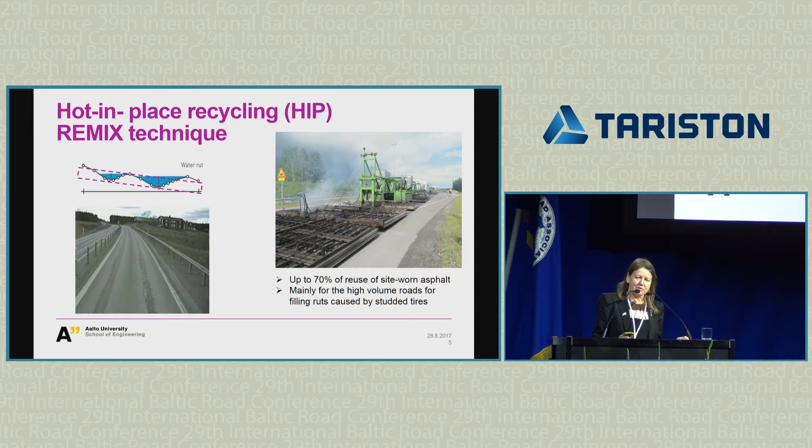We've been doing this over 40 years in Finland, and this hot-in-place recycling is really the working horse for the high-volume roads when we need to fill the ruts that come from the studded tires. The beauty of this is that we can use 70%, give or take, of the old material. We can retain the hard aggregate we've invested for these surface mixes. The cost, depending on how much admixture or new material you add, is about somewhere around half the normal asphalt slab.

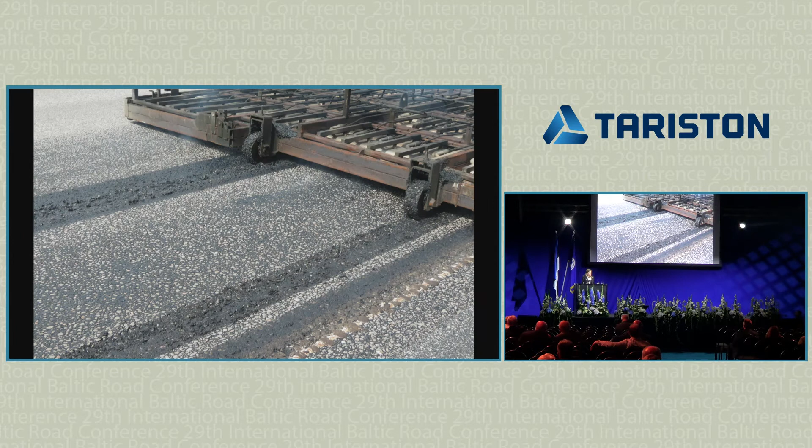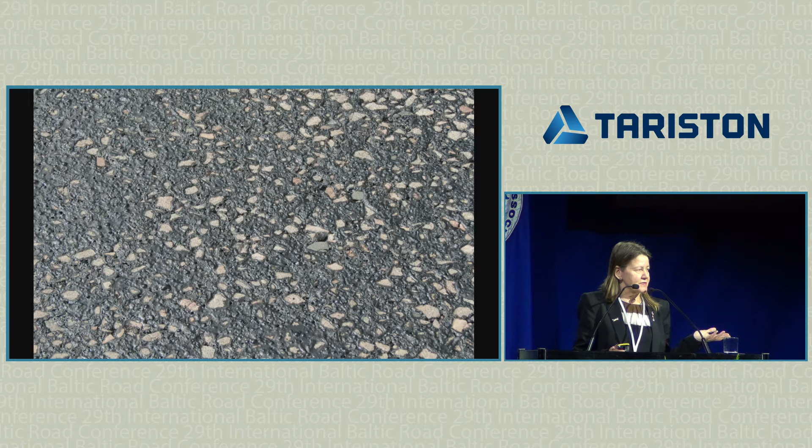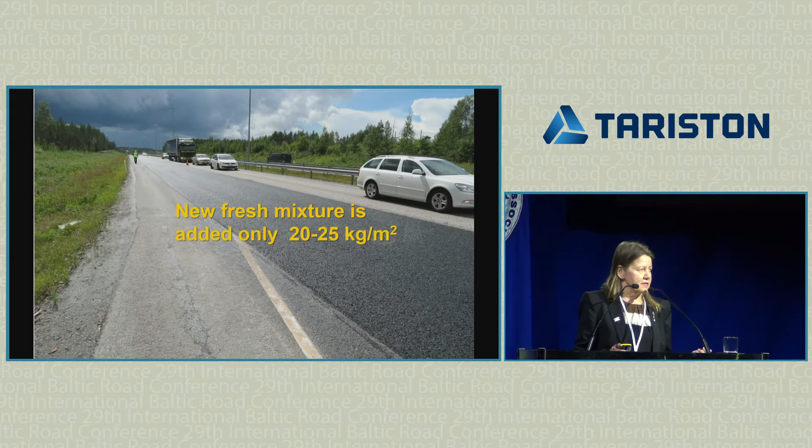So a few pictures. Here is sort of the convoy, heating elements. This is the heated surface - this is how it looks like. Ready surface - now the admixture has been added, scarified. The heated surface is scarified, then admixture added, rejuvenators added, then it's laid and compacted, and we have a nice ready surface for driving. As we add only these 20-25 kilograms, it sort of makes it a cheap way to fix the roads for rutting.

But it doesn't add any structural capacity, so that's sort of the key thing to remember - if we need structural capacity, we need to use something else. Also the problem is that if the road has segregation, you can't really fix it, you just sort of change the place. And if there are layers which are separated, maybe you can fix the first one, but then not the second one. Well, none of the methods can do that.

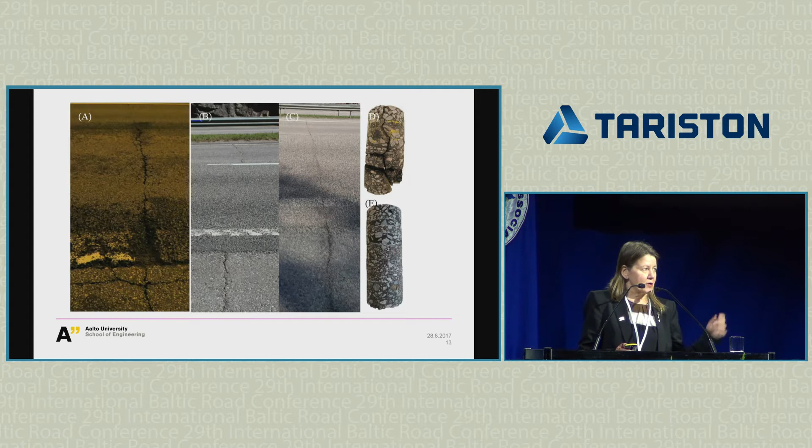You have to dig the whole road up. But if there are any cracks, it fixes that at least for a while. Of course, they will eventually reflect through. But this shows, like Highway 1, very thick pavement, so you can keep recycling. And that's sort of what we try to study right now for Finnish Road Administration - how can we do the recycling multiple times so that we can benefit from the investments we have been doing before by having all those layers of asphalt in the road.

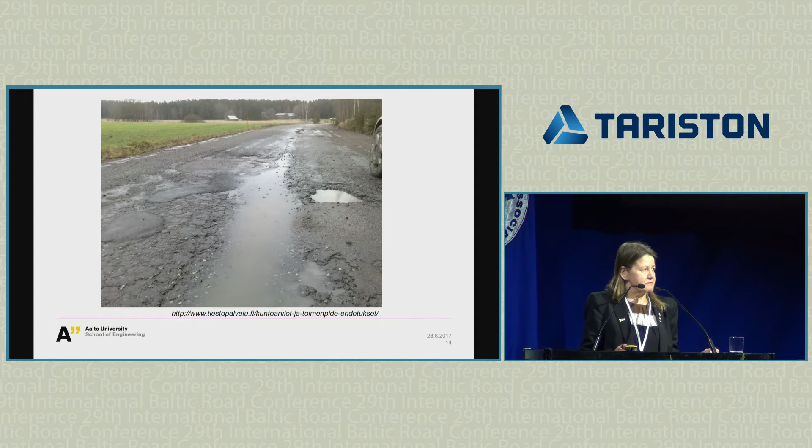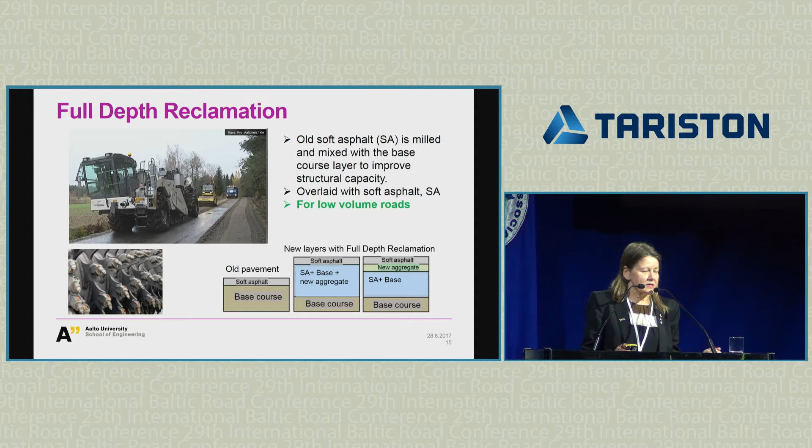Then at low volume roads, if it looks like this, there's no point to do any patching anymore. You really need to do some structural fixing. So what we do is full depth reclamation, where the old asphalt, soft asphalt, is mixed into the base course and maybe some new crushed material added, then you just put it back, compact it, and then new soft asphalt. This is really a structural method to add structural capacity, and it has replaced basically the stabilization in Finland - this is very popular in low volume roads.

Then we have this regular asphalt recycling. Site-worn asphalt is processed at asphalt plants and used in the surface mixes. Finnish specification allows use of 50% in surface and base mixes. And then there's this rejuvenation agent, like soft asphalt.

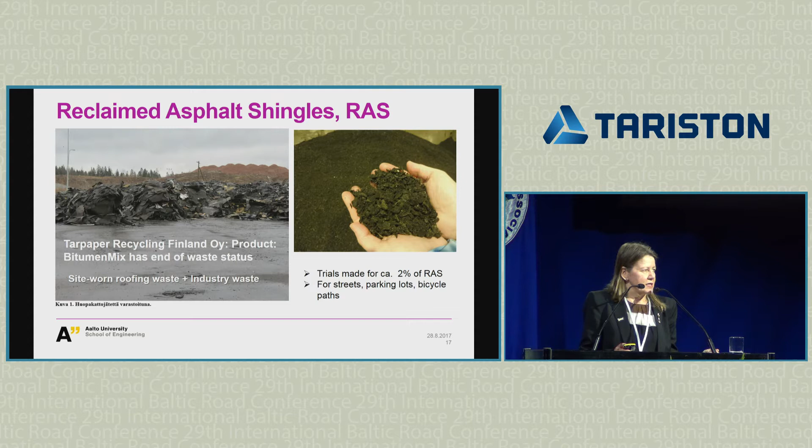The other interesting thing we have been trying is these reclaimed asphalt shingles, the roofing shingles, mixed with industry waste, producing a bitumen mix material that can be used. We tried about 2%. Of course we need more long-term performance data, but at least for now it looks good.

There are certain issues that need to be solved here, one is how these shingles are classified in the specifications. Finland has been using these recycled materials in Finnish asphalt specifications. We just updated for the European norms, this new reclaimed asphalt specification that states reclaimed asphalt is a constituent material that is ready to be used in asphalt mixes.

But then there are certain things you need to declare. One is the type of binder, if it's paving grade bitumen, modified or hard bitumen, then you have to declare penetration, softening point, soft bitumen's viscosity, gradation, of course.

So with these shingles, the question now is, is it really an additive, or should it be treated like reclaimed asphalt as a constituent material? But the one thing with these recycled materials is that when you use them in the asphalt mix, for instance 50%, the mix has to meet the regular mix requirements, so type testing. And if you change something, you need to do a new type testing.

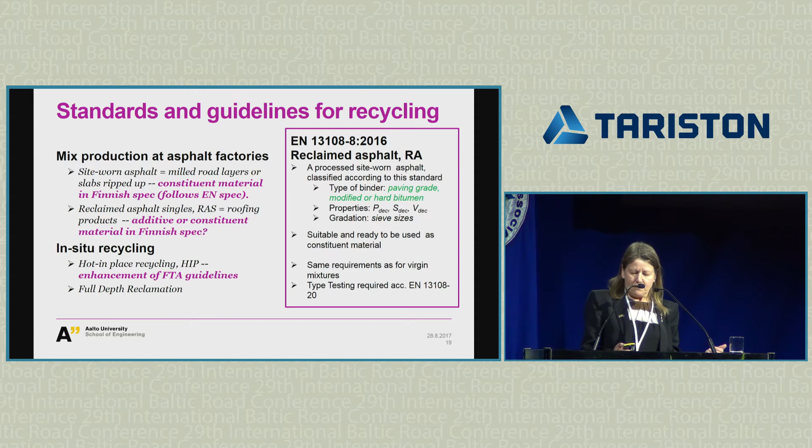So in situ recycling, this hot-in-place recycling, we do this research now for the road administration to enhance the specifications to allow multiple cycles of reuse for the Finnish roads.

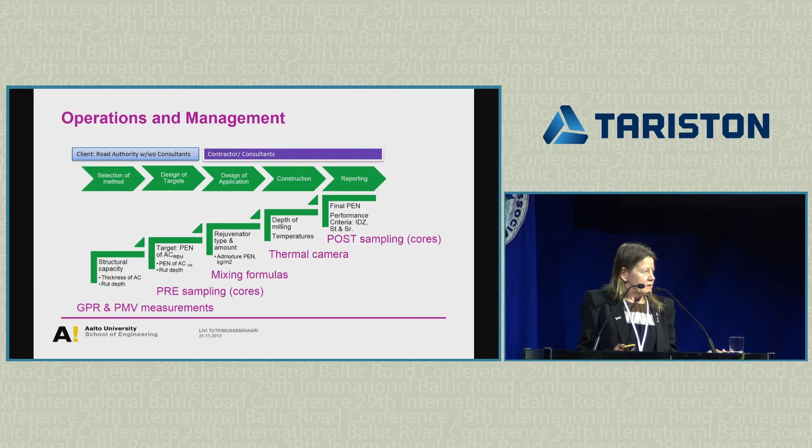So the idea is towards these perpetual pavements, very heavy base courses, and the only thing we want to do is fix the surface layers.

The question is really, what are we expecting from the surface layers, what is the life expectancy. In Finland, when we have these studded tires, the cycle is very fast, so between 6 to 7 years we need to go and do the resurfacing.

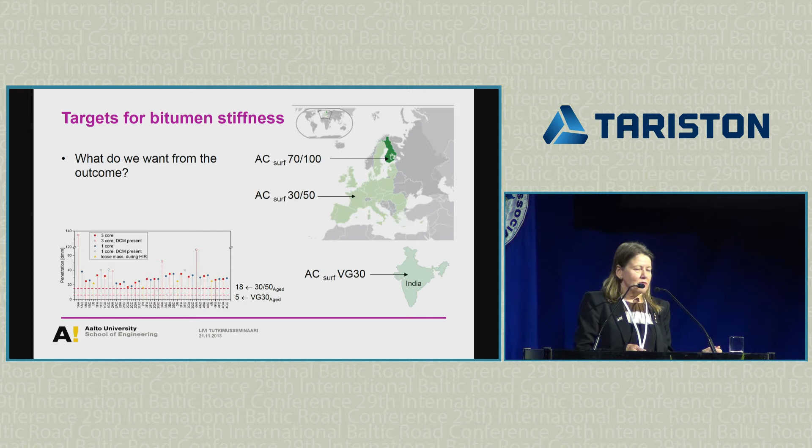But the reason is, again, the climate, it depends where you are. It depends what your climate is, because you select your materials based on that, and then you have to set up your targets depending on what distresses you are trying to prevent.

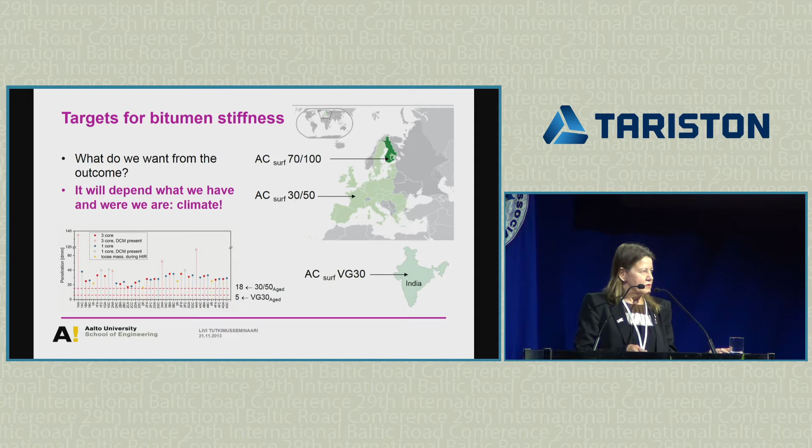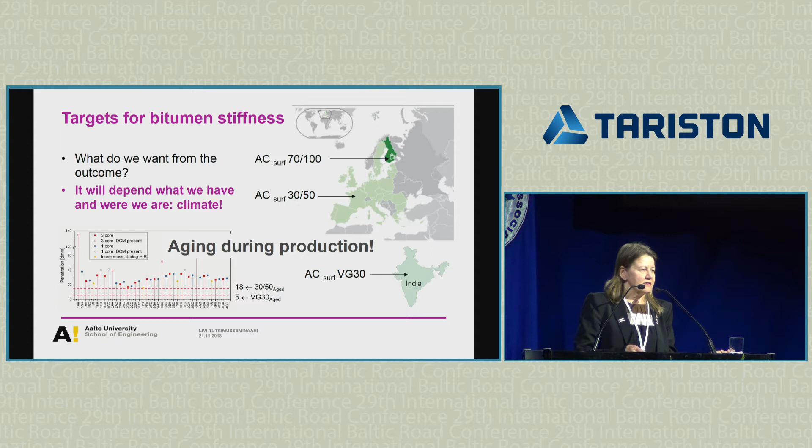And then comes this interesting question, should we take into account the aging during the production? How do we take it into account? Do we shoot for virgin materials or RTFOT aged materials?

So then when we have selected the targets, comes the question of what rejuvenator and how much. We have let's say 3 different ways to do it, like mixing formulas based on these parameters, one based on penetration, then based on G-star, DSR, and then using viscosity.

There's a bit of a problem when you think about alternatives for rejuvenation - this is about hot in-place recycling. We can use soft bitumen, this is very typical. We've also been doing trials for softer bitumens - Michalina Makowska will tell you more tomorrow about these. And you can use oil-based rejuvenators. As you can see, only viscosity could be measured in all of those, and even in bitumens, the problem is when you're not in the Newtonian area anymore, how do you do it? The test methods are time-consuming - tube suction and so forth - so we've been trying to make a shortcut here.

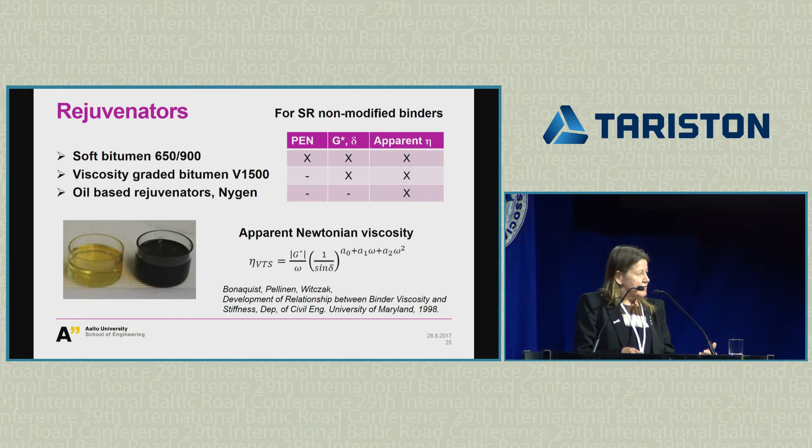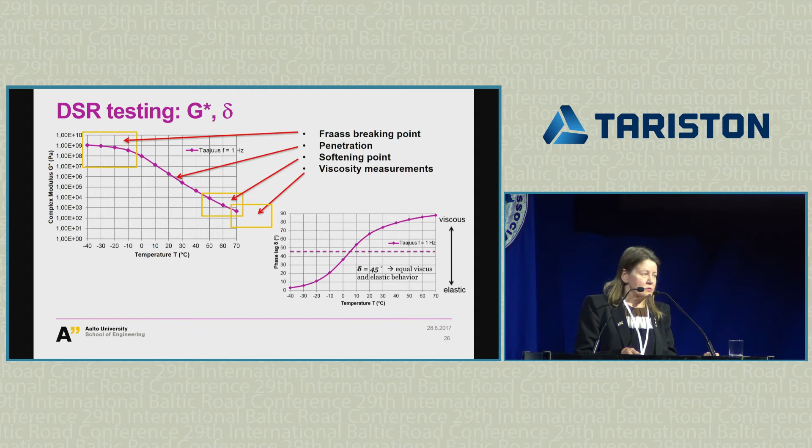So we have DSR testing - Fraass breaking point somewhere here, penetration somewhere here, softening point, and we could also use this for viscosity, but that's high temperature viscosity, and we really don't want to be in high temperatures. We've come to the conclusion that we need to be in lower temperatures, so we selected to do the calculations at 25 degrees Celsius, trying to shoot toward the zero viscosity loading times.

If you think about these two parameters, stiffness and phase lag, it's very interesting because it tells how much the material flows relative to not flowing - of course it stores and dissipates energy at the same time. The more I think about phase lag and its importance, the more I believe it's critical, because if the material has low phase lag, it means it's more elastic - it doesn't really flow. And if it doesn't flow, how can it heal? So at high temperatures if you get cracking, and at low temperatures if you get cracking, if the material can't heal, the cracks will propagate and grow.

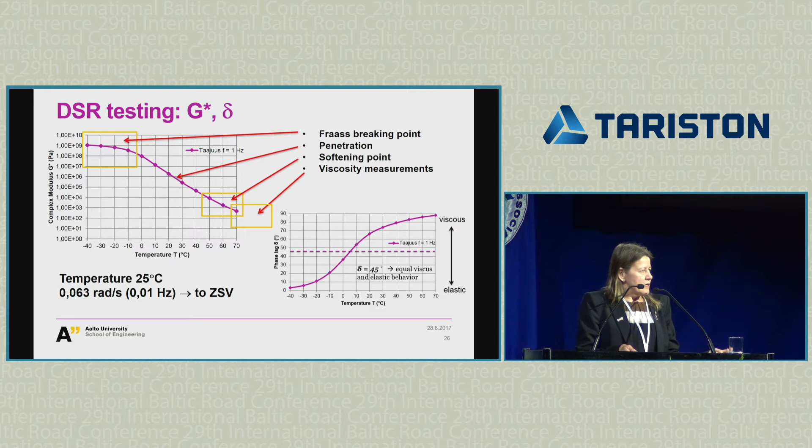So, performance parameters - we found this parameter from the literature relating G-star measurements to the elongation of bitumen in a certain temperature and loading range. These researchers came up with a damage zone concept, concluding there's a bad area with block cracking, and a good area on the other side - where you can be and where you shouldn't be. We took this idea and tried it on our test roads in this very big research project, plotting the samples we had.

So here are the samples we took before recycling, and here is the final product that resulted after rejuvenating the mixes with softer bitumen. We were in this damage zone, and then we came out of it.

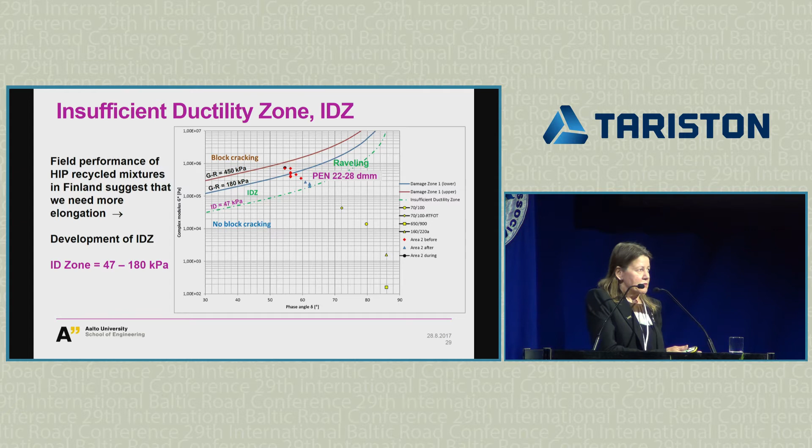So it gives us some indication of where we should be once we've finished the recycling work, to check what we have in our hands. If you think about the RAP in France or in India - the India case ended up at penetration 5, and the other one was 18. The 18 is already in the damage zone, and the Indian binder is somewhere here.

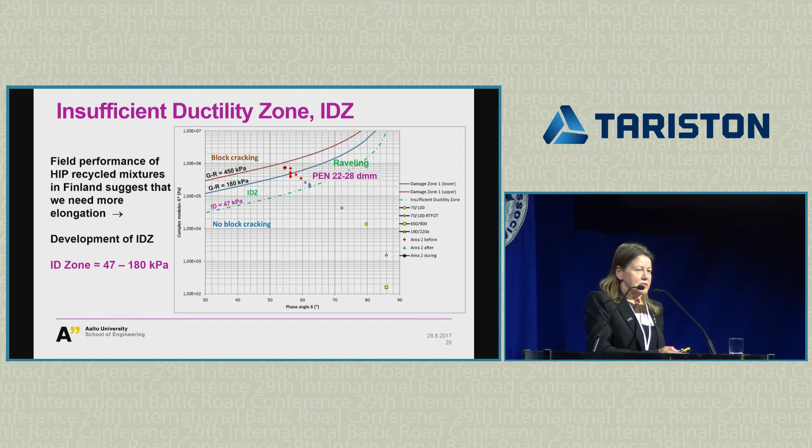So if you want to use it, I think you need to do quite a lot of rejuvenation.

The other performance parameter we've been thinking about is an idea I had about 10 years ago regarding mechanical performance: you have two basic parameters for material, stiffness and strength. The question is which one we need more, stiffness or strength, which is more important? There's really no answer, because it depends where you want to be and what distresses you want to avoid.

Are you in Bahrain? Are you in Canada? Are you in Finland, Estonia? It really depends what kind of materials you have, what kind of structure you have. Some of these are more structural problems, some can be related more to the material itself.

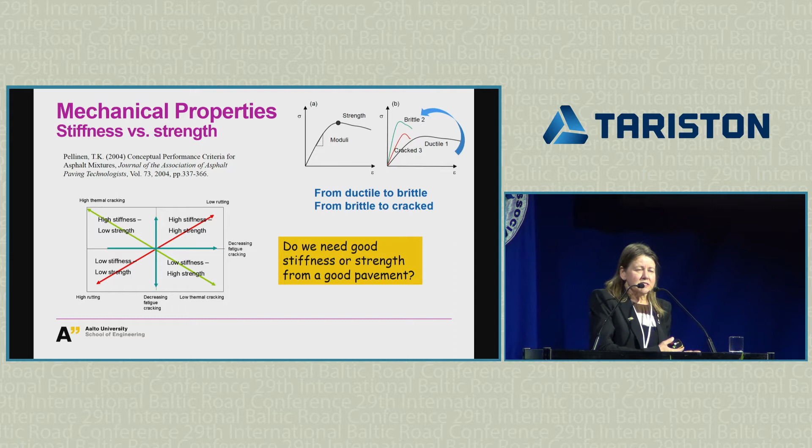But if you think about it, material goes from ductile to brittle, and when it gets brittle, it actually gets damaged. So we have these damage-based performance models and constitutive models. When there's damage, you see a decline of stiffness and strength for the material.

So taking this idea, this is just an example, we've been developing a database for different mixes in Finland. All these mixes are pavement cores, so we use this indirect tensile test to measure both stiffness and strength. We use 10 degrees Celsius to capture the low temperature performance.

What's interesting is that there is no correlation, as there shouldn't be, because depending on what kind of binder you have, you might still have the same strength for the mix, or the other way around, you have the same stiffness but a huge variation in strength. So what is driving what?

Air voids is driving this one, because air has no stiffness and no strength. So really the air voids is driving here while the stiffness is driving there, coming from the bitumen.

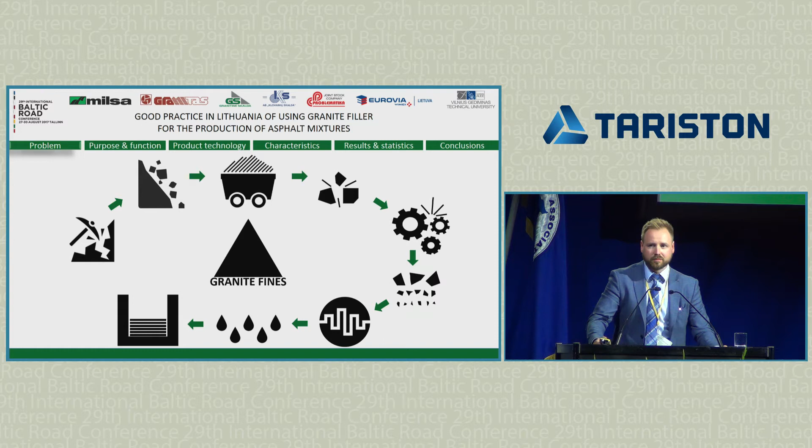Granite fines already occur in the process by blasting, lumping, crushing, and friction during transporting. Part of it comes with the raw material into the factory. Later in the factory we also have processes such as sieving and other natural processes, which also produce some part of granite fines. So the granite product is washed, and all those fines go to sedimentation pools, and later they are transported to special open-area storage places.

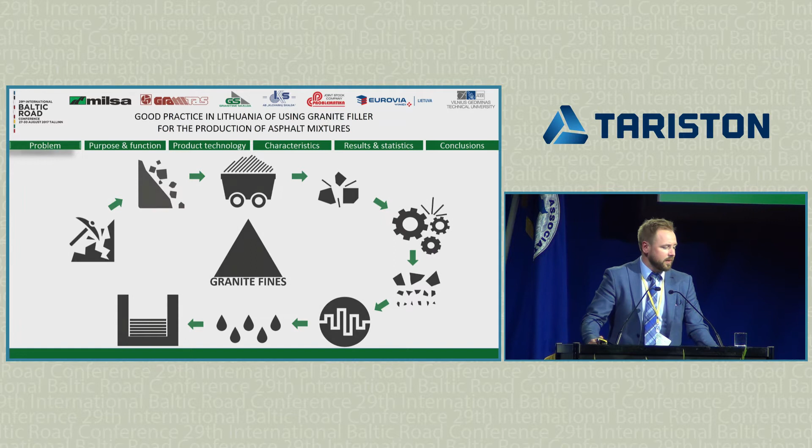If we talk about the amount of the problem, we can say that granite fines make up about 70 kilograms per ton of granite production. According to Lithuanian statistics, between 2013 and 2016 the granite fraction 0 to 16 market took about 1,250,000 tons, making about 312,000 tons per year, and around 22,000 tons of granite fines per year.

So what would you have? Without any additional processes, granite fines are treated as waste. What we do with the waste is utilize it or just store it in special storage places, and that is actually quite expensive. Talking about utilizing granite fines, personally I haven't heard of any solution for utilization. If we talk about the industry globally and about crushed stone factories in this particular situation, our aim and goal is to have waste-free production.

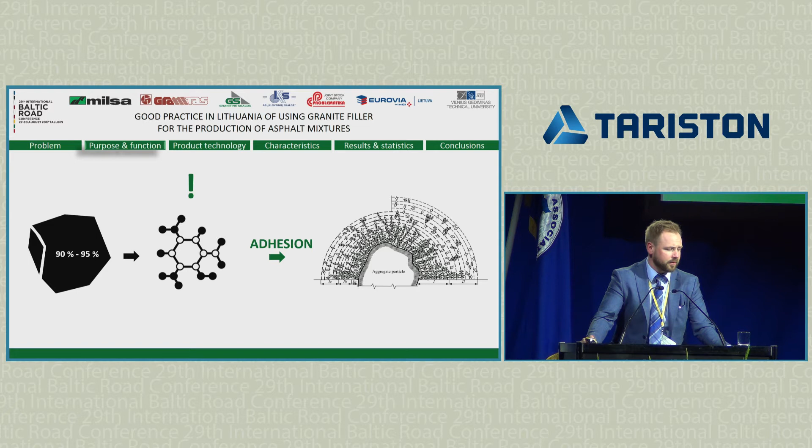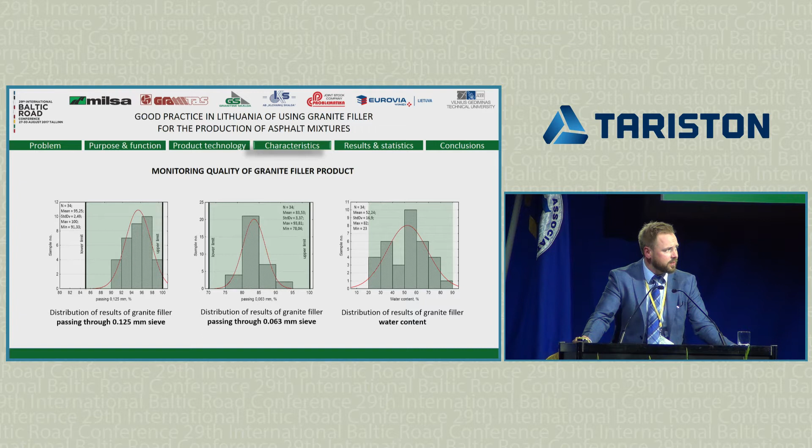Here you see declared values of parameters of granite filler. It all satisfies the requirements of mineral filler for asphalt mixture. To show you the stability of production, I put some histograms of, in my opinion, the most risky values with the biggest frequency during the producing process: passing through 125 micrometers, passing through 63 micrometers, and water content. As you see, they stay strictly within the requirement limits.

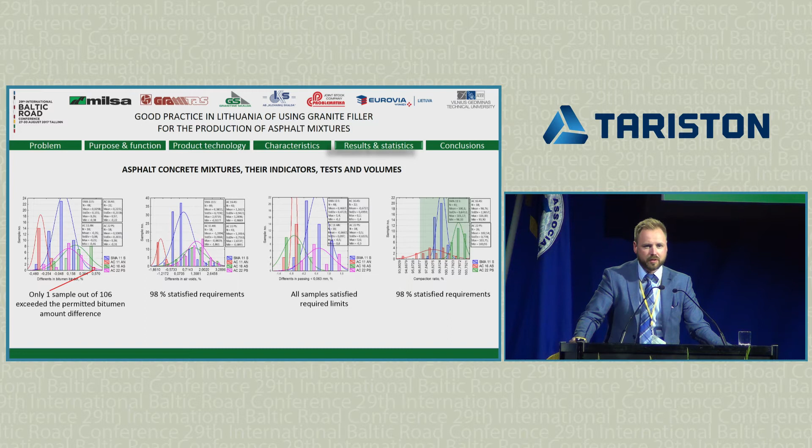To conclude this presentation, I want to say that granite fines occur in production due to different processes, and they take up around 7%. So we have some kind of waste, if we don't make a different and special process to handle it and use it somewhere.

So the goal of our production is waste-free production, and this waste we can certify and use for something useful.

Also, production and science do not yet have a clear answer on the asphalt concrete mixture's mechanical strength and durability.

The practice of using granite filler for the production of asphalt mixture during 2016 has shown that this product does not impair the quality of an asphalt mixture when comparing its quality to conventional mineral filler. Physical and mechanical properties of a recently produced asphalt mixture and pavement made from it are determined by applying classical standard testing methods. So the absolute values of these indicators show the suitability of a granite filler for the production of asphalt mixture.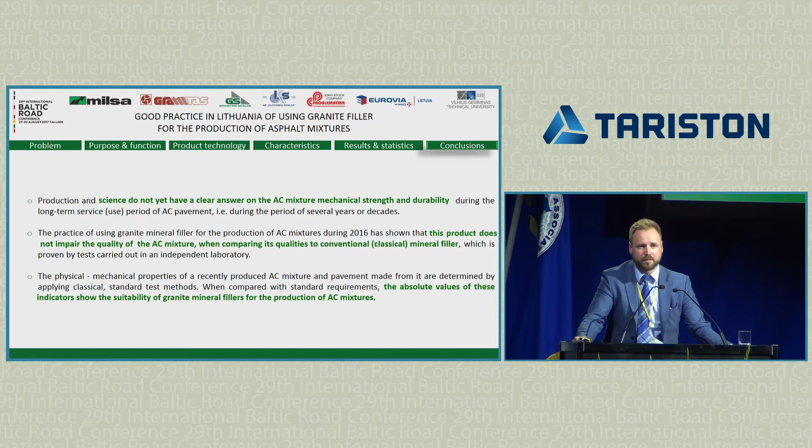So that's all I wanted to show you with my, I believe, short presentation. And if you have some questions, with pleasure, I will try to answer you. Thank you.

Any questions? My name is Heikki Alang and I'm from Lemminkäinen subsidiary here in Estonia. I would like to ask, have you checked during these tests also the chemical composition of this mineral filler?

Yes, yes, we do have. As far as required by the European Union norm, so we did the chemical analysis.

I didn't see the name of Lithuanian Road Administration among the participants there. Do you know, and can you comment on the attitude of Lithuanian Road Administration to the results? Thank you.

I think we should ask a road administration representative, but as far as I know, road administration looks at the quality of a road just within the limits of norms, and if it's satisfied, it's okay. As I showed in my last slide, I believe it was written that only standard testings show the quality of asphalt, and actually for the purpose of knowing the real thing, we have to make some different tests that are not standard. It's my own opinion. I have a question.

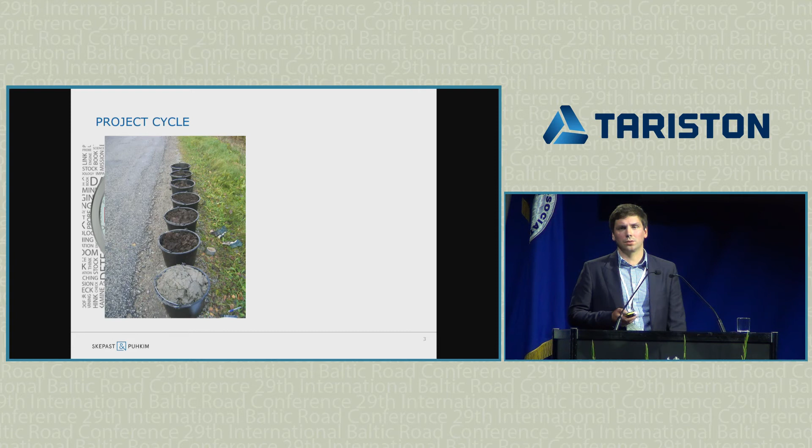First we did a lot of work behind the desk. We did the project plan, planned different steps, how to do it. Then we did field research on site. We did a lot of laboratory researches in Finland, together with Ramboll Finland. Then in this project, the actual 2 pilot sites were built in Estonia, followed with technical monitoring and survey of how this construction came out. So I think we covered all the logical steps to find out does this work or not.

I have to go back to history, as during this project it was asked many times why are you bothering again with this oil shale ash. It was tried in the 1970s and 80s, and it didn't work out. Everybody knows that. So why again this waste of money and time? I think I should explain briefly why we did it again.

It is true that in the 70s and 80s, yearly some 100,000 tons of oil shale ash was used in road repair and in agricultural industry. But the difference from today was that, for example, the dosage accuracy was not so good, so the material was used however it happened. And there was no special machinery to do the work with oil shale ash back then. Also the amounts of oil shale ash, we can say today, were much too big.

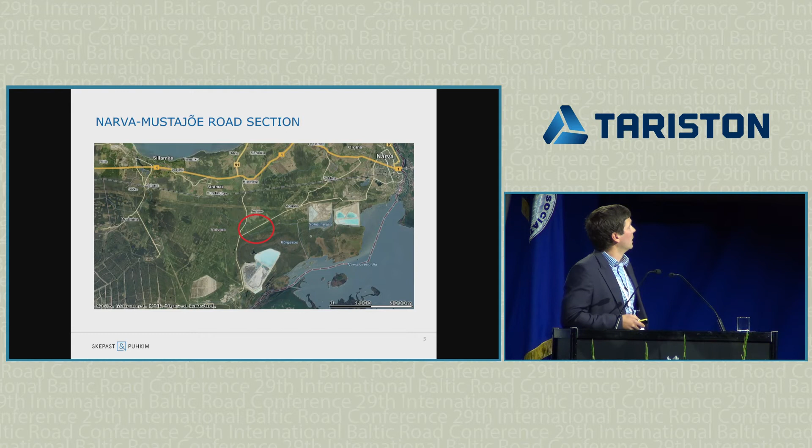So we had two pilot sections in different locations in Estonia. The first of them was on the Narva-Mustajõe road section, between two power plants. There was a 1.6 kilometer long road section where we tested different oil shale ash qualities. It means that we had different thicknesses in layer stabilization. We tried different oil shale ashes. We played with the amounts of oil shale ash and cement in the mixtures. So we had altogether seven subsections.

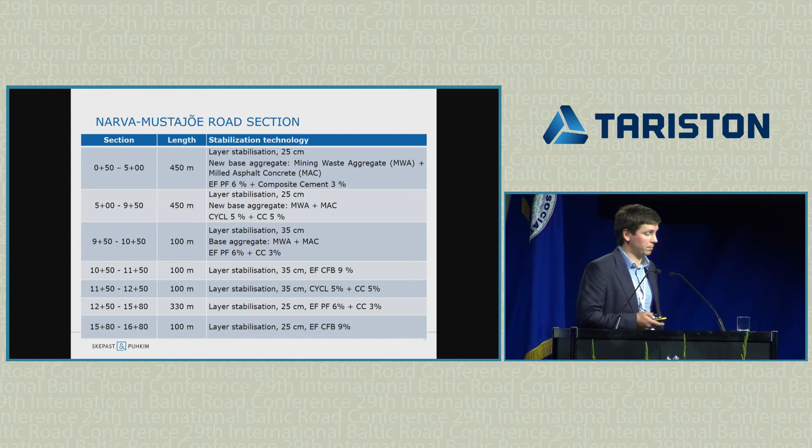We did a lot of quality control activities in this section: water content testing, compaction measurements, unconfined compressive strength testing, freeze-thaw durability testing, and load-bearing measurements. So I will talk about some of them to you.

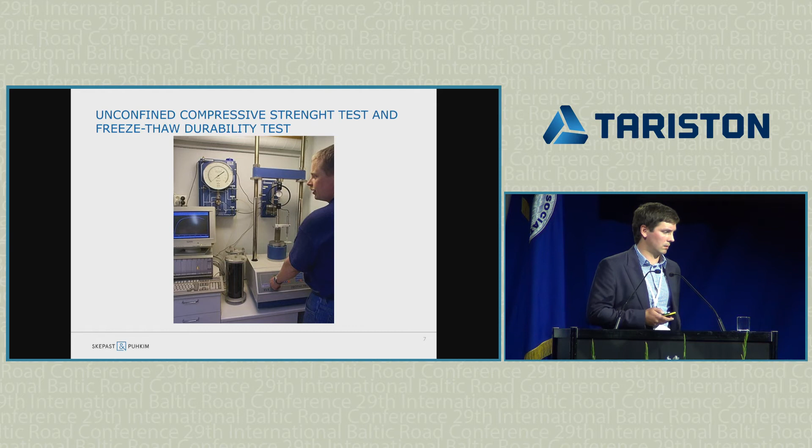Unconfined compressive strength testing is a very typical way to find out how this material resists force. So we took several samples to the laboratory and applied force to them to find out how strong they are. Secondly, we did classical freeze-thaw durability testing in the laboratory.

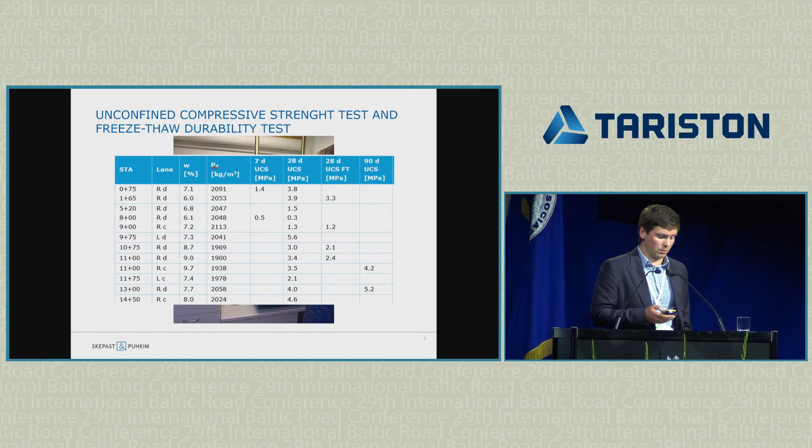Then we had this freeze-thaw durability testing, where we basically took the samples and put them in a freezer, then took them out, melted them, then put them back in the freezer, took them out again, and did it several times. After that, we did this compressive strength testing again. The idea was to check how the samples are resisting our weather conditions as we have them.

Here you can see the results of the freeze-thaw testing, and the decrease of the resistance was about 15%. So this is considered a good result.

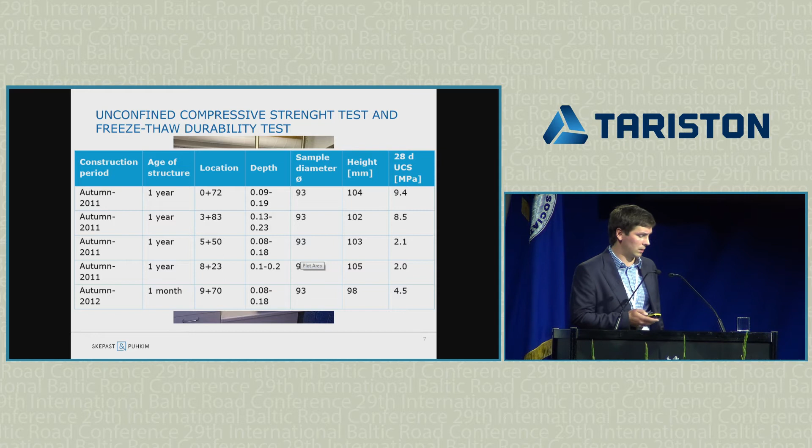Then the second road section. This was Simuna-Vaiatu in Lääne-Virumaa.

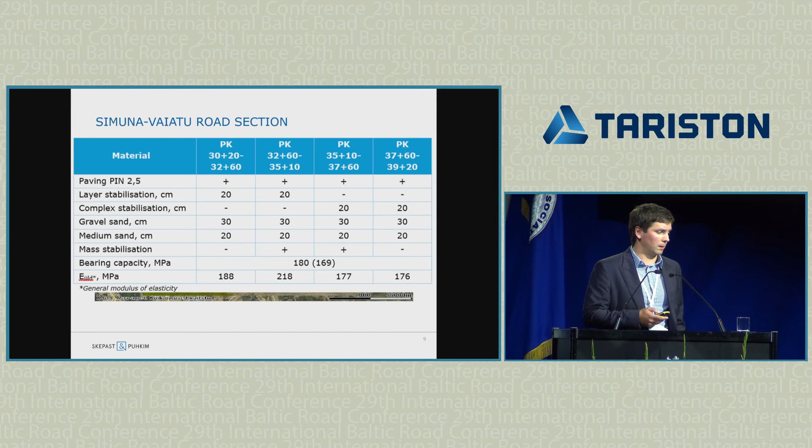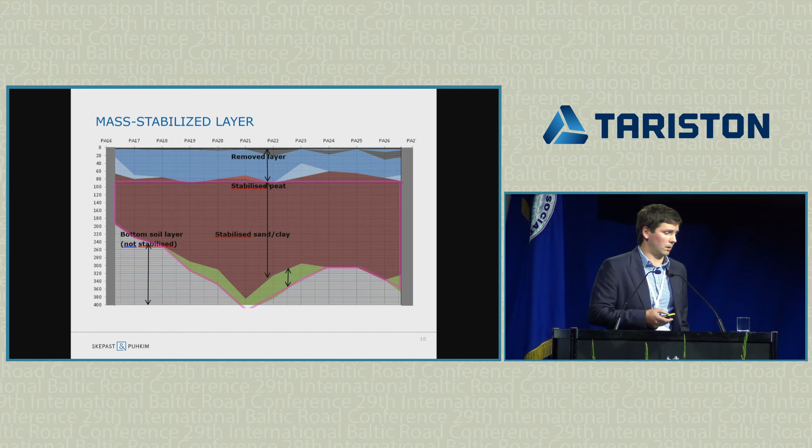This was a swamp or wet area, but on an existing road, where the main purpose was to try out mass stabilization works with this layer here. This is the peat layer, which was mixed with oil shale ash material, and it was about 1 to 3 meters thick under the road.

We tried different binder recipes with different oil shale ashes. We tried cyclone ash and also 2 other ashes from the so-called newer burning technology boilers. We also added some cement to the mixture, because the laboratory results showed that oil shale ash alone does not work so well.

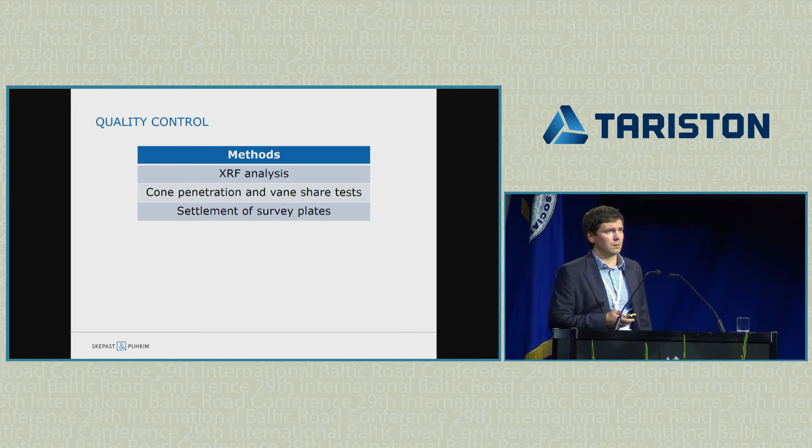About quality control actions, there were 3 main actions. First was XRF analysis. Then we did cone penetration and vane shear testing, and then we measured how the layer is settling after the mass stabilization works ended.

XRF means that we had a calibration mixture prepared in the laboratory with the optimal and ideal content of calcium in it, and we took several material samples from the site after the mass stabilization mixture was done, and measured the concentration of calcium. The purpose was to get numbers as close as possible.

You can see that they were quite close enough, and this is just one example of the results - we have a long list of them. The method was very simple, done with portable machinery on site, a very fast and effective way to find out the results.

Then we had cone penetration and vane shear testing, done also in different locations. The first was some 2-3 months after the mass stabilization works ended, and the idea was to find out if the stabilized layer had become uniform and homogeneous enough.

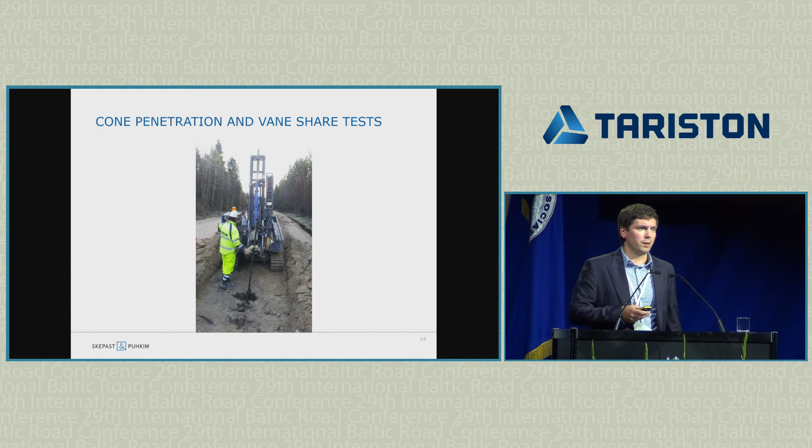We set ourselves a target value of 50 kilopascals. We did the second cone penetration and vane shear testing about 1 year after the stabilization works ended, and the results showed increase of the uniformity and homogeneity of the mass stabilized layer.

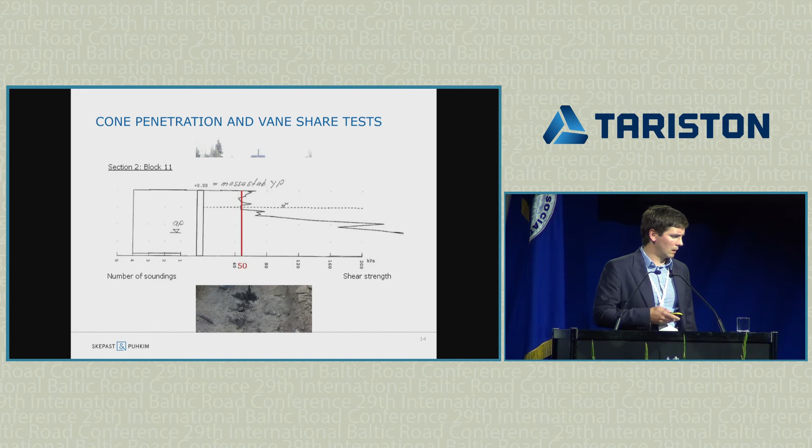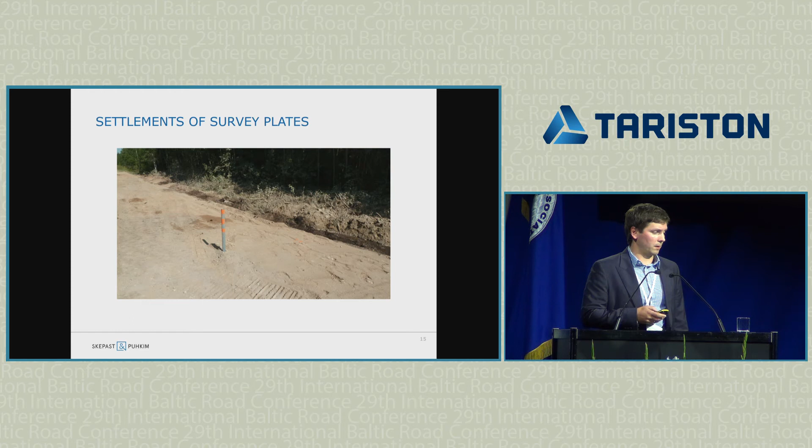Then we measured how the stabilized layer is settling. For that, we installed 5 metal plates on top of the layer, and put 1 stick into each to measure the height in different places. We found out that in about 1 year, the settlement was some 4 centimeters.

This is okay, also based on experience in Finland, as this was done on an existing road. When it's done on a completely new road, of course, the settlement is bigger - the numbers are bigger.

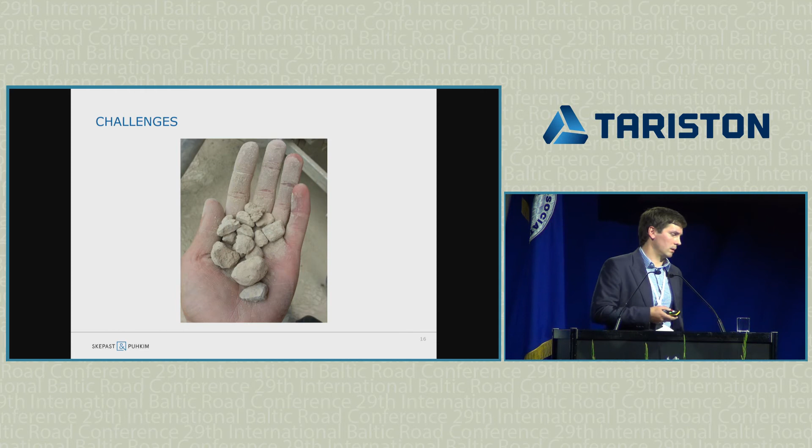Then we had problems with oil shale ash at the mass stabilization site. There was some inconsistency in the material - there were small stones inside it which were blocking the tubes. But we now know this, and Eesti Energia, as the producer of this material, can make some adjustments to its technology. I think the main challenge here is that there is yearly 6 million tons of oil shale ash coming out of the power plants in Narva, so there is a lot of unused good material.

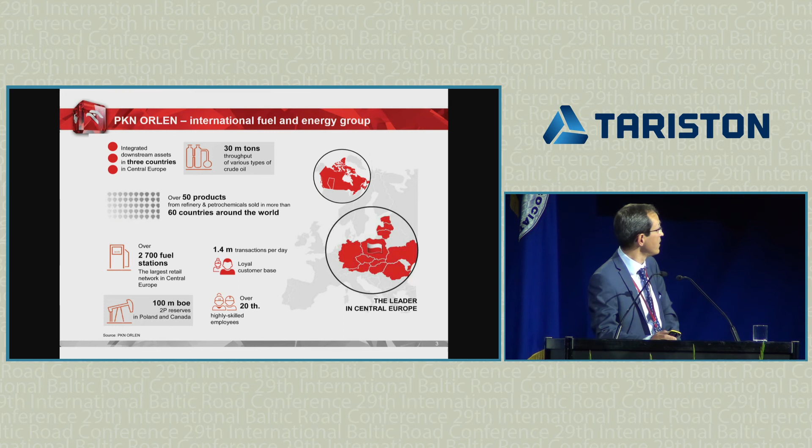Orlen Asphalt is a part of PKN Orlen Capital Group. We operate production and selling of bitumens in 3 countries: 2 refineries in Poland, 2 refineries in Czech Republic, 1 refinery in Lithuania. And since 2012, we also operate a special place for reloading and selling bitumen in Romania. In each place, we offer many bitumen products, mainly paving grade bitumens, which are the most popular products in this part of Europe. However, in 1 refinery, we also offer multi-grade bitumen, in the Czech Republic, and in many places also polymer modified bitumens.

After this short presentation of our company, I want to take an introduction to the main topic of the subject. Everybody knows that bituminous binders are thermoplastic materials, and therefore their properties depend on temperature. However, the most popular properties of binders and then asphalt mixtures concern rutting resistance. In Poland, for many years, we were fighting against rutting, and we know what resistance to rutting means. It means that we should use a better aggregate skeleton, and probably use stiffer, harder bitumens. And if we think about rutting resistance, it is okay, but on the other hand, we should remember that we also have winters, and at winter time, there are other types of problems.

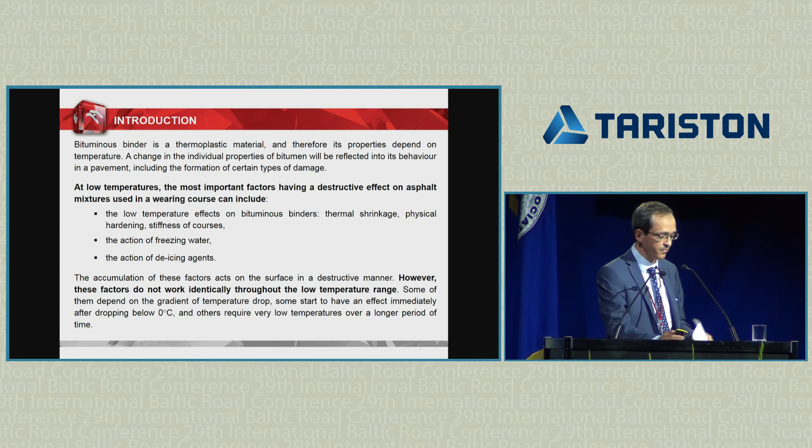Frankly speaking, the bitumen industry for a long time has been looking for a method to evaluate not only binders but also asphalt mixtures. And as I said, when we look at rutting resistance, the problem is solved. Everybody knows that in the European standard for rutting resistance there are almost 4 testing methods. But when we think about low temperatures, there is no such clear situation. So we wanted to select raw materials used for bitumen and polymer modified bitumen production. So we decided in the past, in our research program, to use for the first time the Canadian method LS-308. It is sometimes called the extended BBR method.

This method determines to what degree bituminous binders are stiffened as a result of physical hardening. Physical hardening is, let's say, one of the topics of this presentation, and I would like to describe this phenomenon in the next slides.

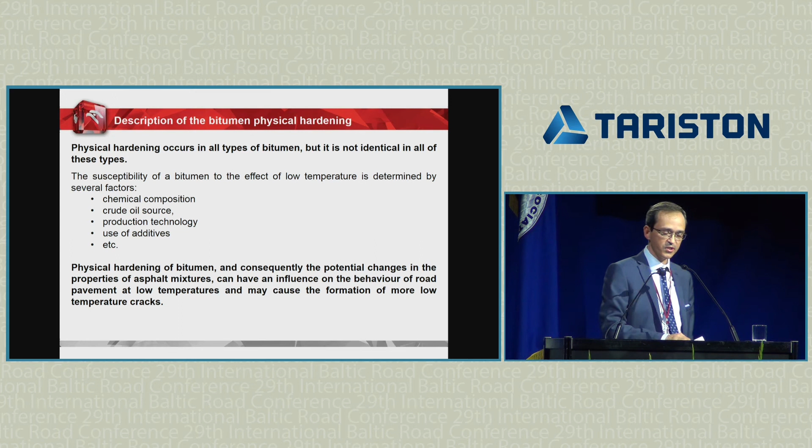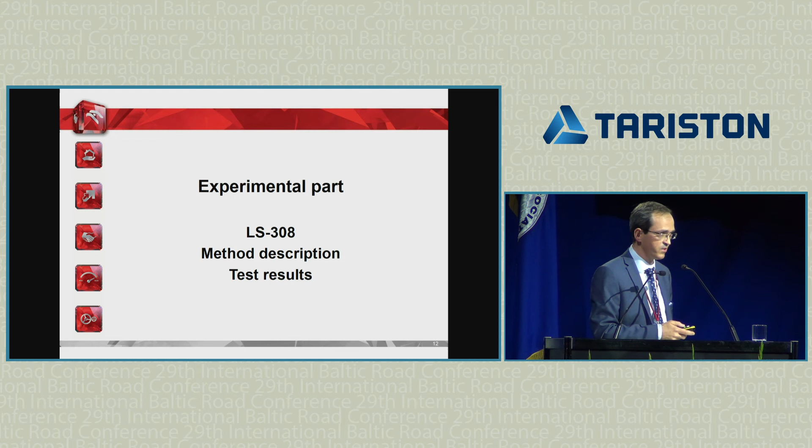Some slides about the LS308 method. The method is based on BBR equipment and starts from the same rules as BBR testing, probably known from the Superpave system, which is very popular in North America.

But in addition to this typical test, we introduced a freezing conditioning period. After a specified time of this conditioning period, especially after 1 hour, 24 hours, and 72 hours, the stiffness of the samples is measured, and then based on calculations which are very detailed in the standard, we can calculate the final assessment of the binder, which is called grade loss.

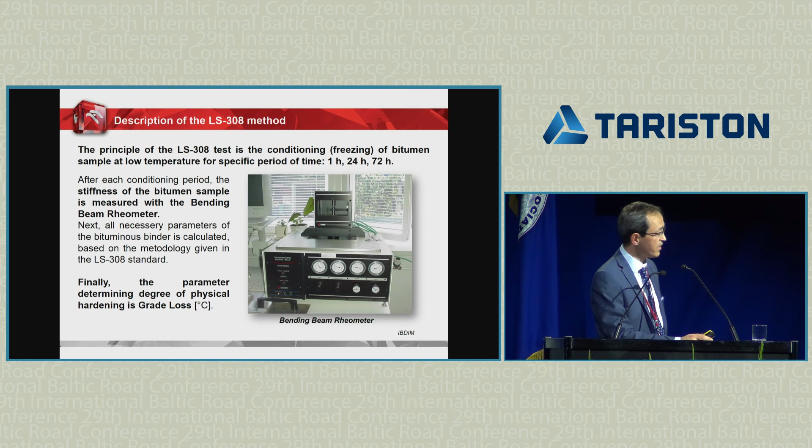As I said at the beginning, and what is important at this moment, these results I will show you are part of our bigger research project, which was focused on selecting raw materials for production of pure binders and for polymer modified binders. Unfortunately, at that stage of the project we mainly used hard bitumens, because, as I said, in Poland they are the most commonly used products.

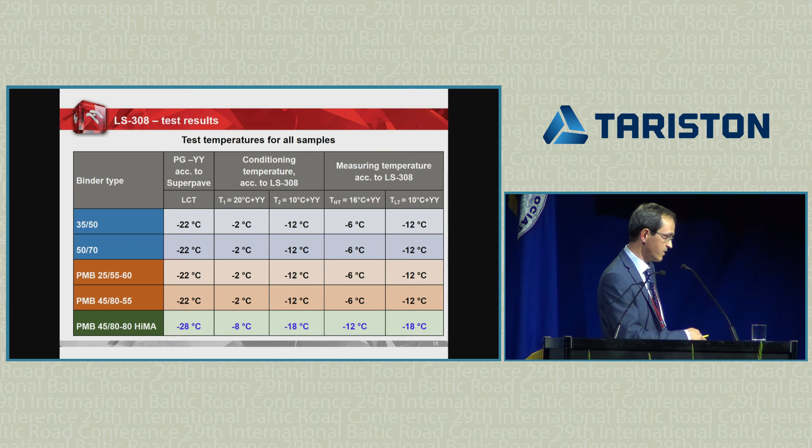Some results: first, the table with temperatures of conditioning, of freezing the samples. The base, according to this method, is the low critical temperature from the Superpave method, and then based on this we calculate the freezing temperatures.

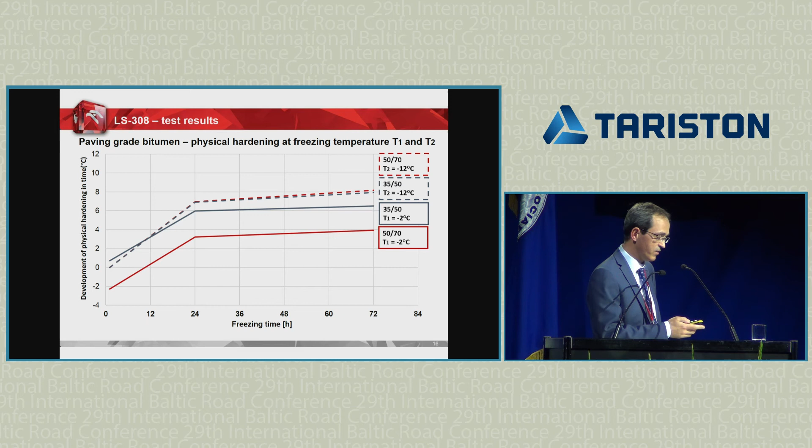And some results for unmodified bitumens with special raw materials: we can see that during the first 24 hours, the stiffening is at the highest level. Then between 24 and 72 hours, the stiffening is not so sharp. This is similar for polymer modified bitumen.

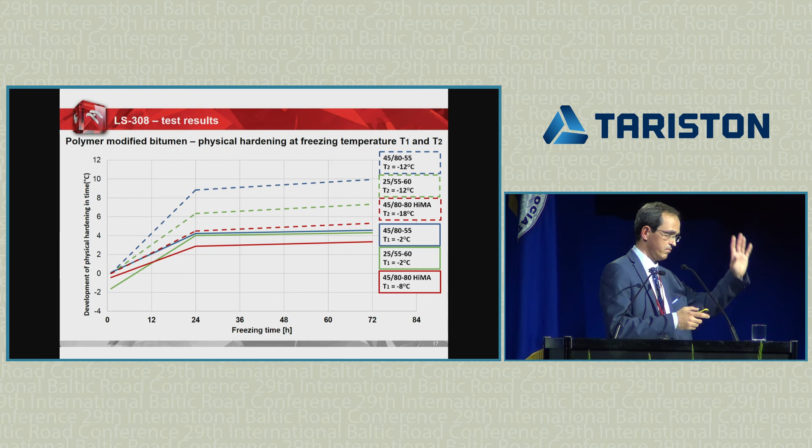You can see that in this polymer modified bitumen, which contained a special mix of polymers, we tested how it behaves, and we can say that it is a good idea to use this kind of polymer.

Then we tested asphalt mixtures according to the well-known method, TSRST. This is a method not especially for physical hardening, but for thermal shrinkage, and for this purpose it is a very good method.

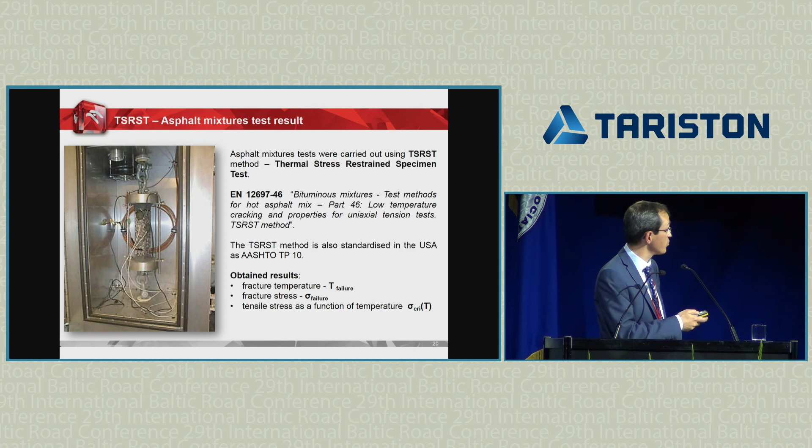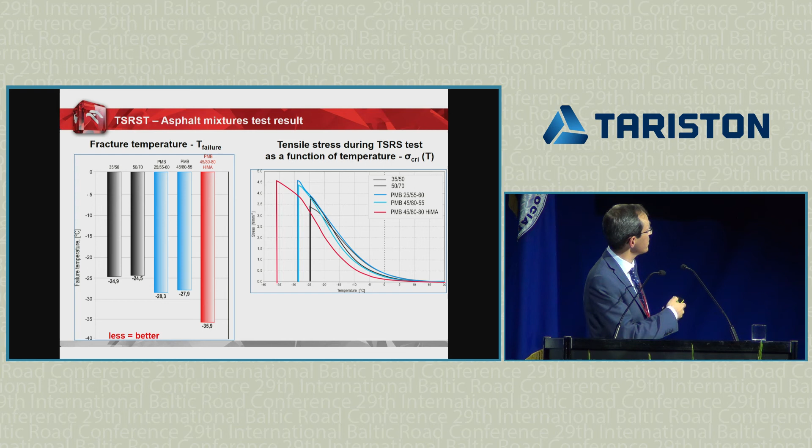Results, these are the same laboratory prepared samples. You can see that there are visibly three groups: unmodified bitumens, modified and highly modified bitumens, and then temperature of the cracking. There are also three groups with the superior result of highly modified bitumen.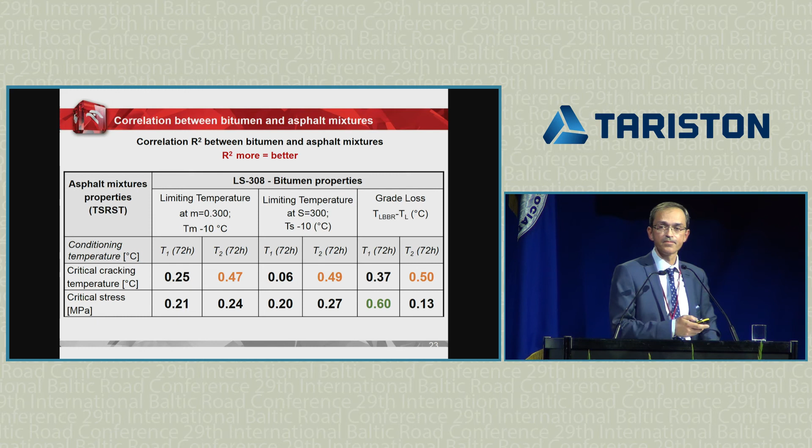And some summary of this presentation: physical hardening is influenced by the temperature and the time of freezing of bitumen. It is obvious that the lower the temperature and the longer the freezing time, the greater the effect of physical hardening.

What is also visible, and in very good agreement with other publications on this subject, is that the greatest speed of stiffening is observed in the first 24 hours of freezing. So we could say that the first day in very low temperature is the most dangerous for the wearing course.

Highly modified bitumens, due to the very high SBS content, by mass more than 7%, but by volume more than 50%, are characterized by the lowest LCT and highest resistance to physical hardening. This is very interesting information for us because it means that the polymer used for HYMA is a very good polymer.

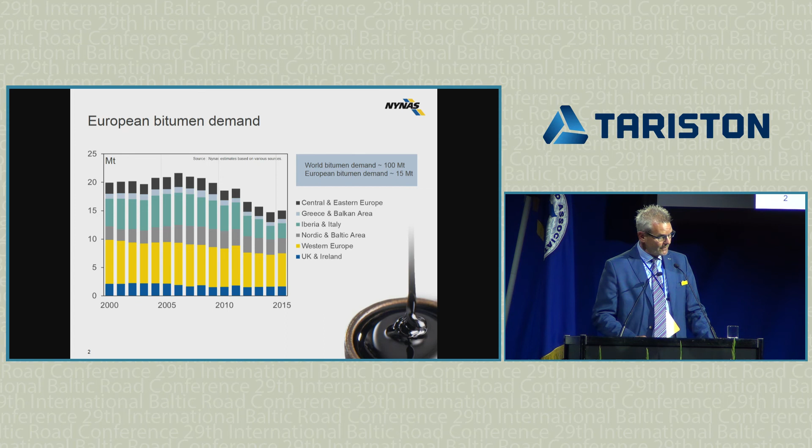The supply landscape, because bitumen is produced in refineries, you have to look at the refinery landscape. Where is bitumen produced in Europe? During this 15 years' time, refineries have rationalized and changed. Refineries have disappeared - the number has dropped from 130 or so. And crude processing capacity in Europe has dropped too. Today we're producing bitumen in approximately 55 refineries in Europe.

But the number may change in the near future still. Because of these changes, we can safely say that bitumen is traveling further today compared to 10 or 15 years ago. As a consequence, our customers may see some further variations from a quality perspective of bitumen and the source of the material.

On a positive note, I think it's important - we've seen since last year that bitumen demand seems to be increasing moderately again. It's also important to understand that bitumen production capacity looks like it will be sufficient to meet demands in the future. But of course, being a seasonal product, there will be ups and downs, and during the season there might be some tightness in bitumen availability.

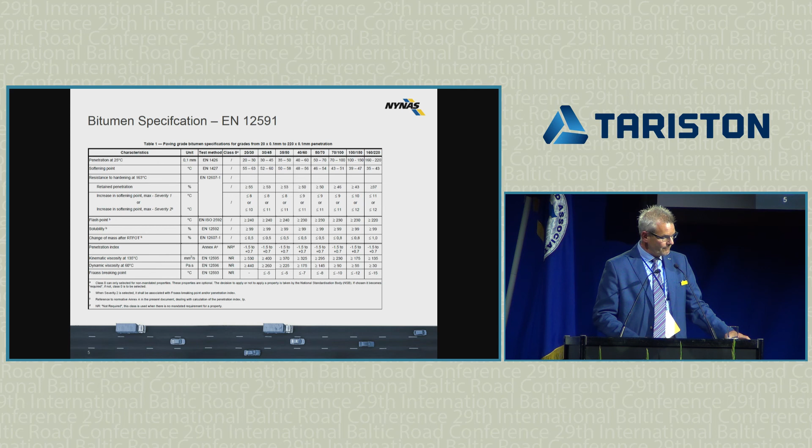Since the introduction of harmonized bitumen specifications - which consist of pen, softening point, traditional test methods - there's been quite a lot of research done in Europe and outside of Europe to look at and understand bitumen deeper and better than just looking at standard empirical test methods. I've given in the following a little bit some milestones around what has happened.

What has happened in terms of research around bitumen is moving from empirical specifications to more performance-related specifications. This is important because that is what the regulation today in Europe requires - we have to use performance-related specifications rather than empirical specifications. Now, all this research has helped us at least to understand a little bit better the rheology and the behavior of bitumen and how it works in the field and in the lab.

It's important to meet those performance specifications because the demands on roads have changed - there's more traffic, higher demands, and we are required to build our roads using sustainable methods, longer life, and durability. Now, what does that mean for bitumen quality? Today, the majority of standard paving grade bitumens are still specified using traditional test methods, and specified using an aging method which tries to simulate the short-term aging of bitumen. However, we know that our roads have to last longer.

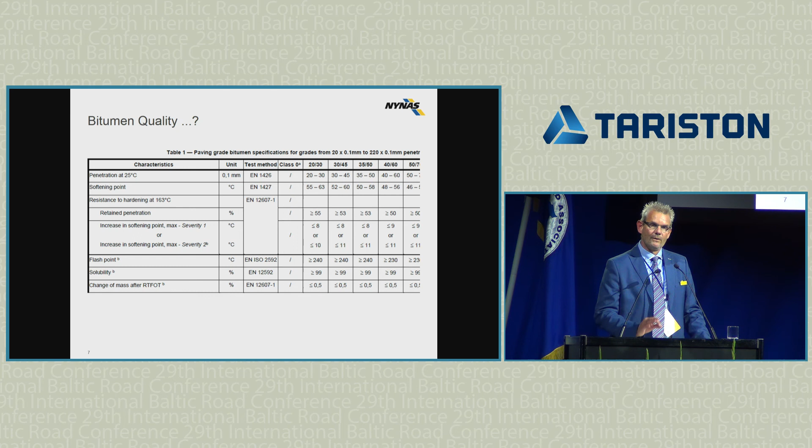We know that bitumen has to last longer, so we have to look at long-term aging. Recent research from outside of Europe has shown that there are some failure phenomena on roads that are not cracking-type phenomena directly related to temperature or traffic, but are more related to the aging of the asphalt surface, and consequently the aging of the bitumen surface.

In 2011, a paper was published by Mike Anderson that demonstrated this. They looked at phenomena where, short-term, after a few years, cracks and raveling started to appear on the asphalt surface, and they tried to link that to the rheology of the bitumen.

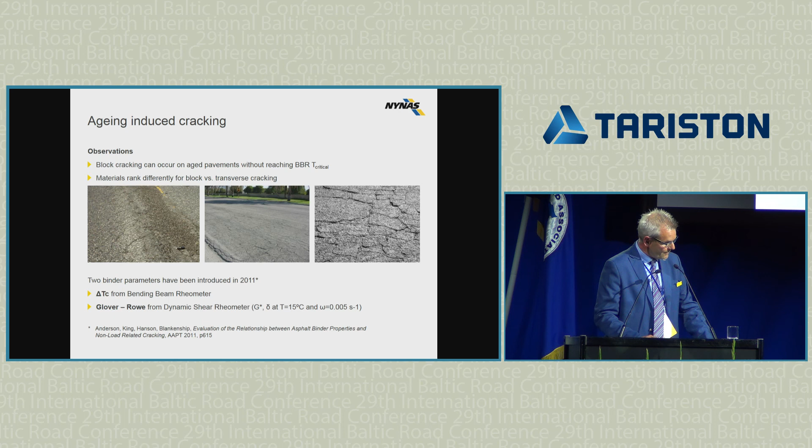Two parameters have been important in this research. One is called delta TC, and the other, which Professor Pellinen has already mentioned, is the Glover-Rowe parameter. I will focus my presentation on delta TC, but I'll make a little mention of the Glover-Rowe parameter as well. Now, why is this important?

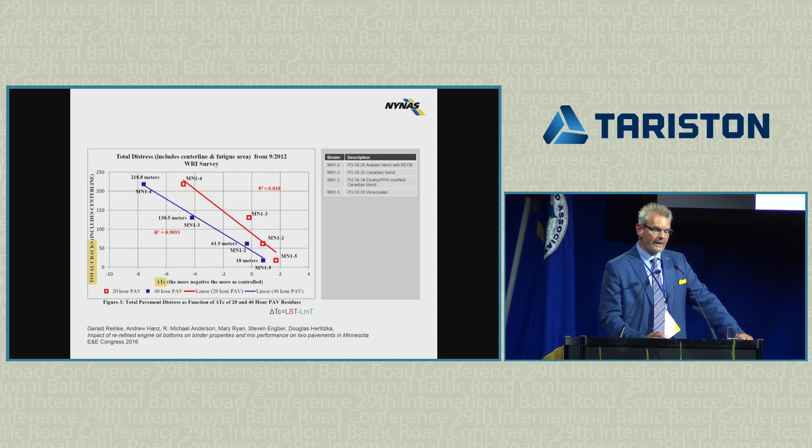Last year, Gerald Reinke and his colleagues published a paper at the Eurobitume conference showing field performance. They looked at cracking of field sections and compared that to the delta TC of the binder recovered from the pavement. You could see that delta TC was an important driver for the cracking of these field sections. So it's quite important to see there's a link between the performance of the asphalt and this parameter of the bitumen.

Now, how is that relevant for us? In Europe, we don't currently have a bending beam specification for standard grade bitumen or polymer modified bitumen, but we do have the test method. We've taken the test methods from the US to better understand the rheology of bitumen.

In this example, we've tested 5 different bitumens that are quite common and meet the European specifications, bitumen A to E. There's one 40-60 grade, the rest are 50-70 grade. We've done bending beam tests on these materials.

In the bending beam test, you test two critical parameters. One is called the LMT, the limiting m-value for relaxation, which is basically driven by the slope of the stiffness versus temperature curve. The second parameter is LST, the limiting stiffness parameter. These two parameters are an integral part of the Superpave specification.

But what is new, and what they've discovered, is that the difference between these two parameters, delta TC, is quite important. It is this parameter that seems to be driving some of the durability failures on asphalt pavement, and therefore this parameter could say something about the durability of the bitumen.

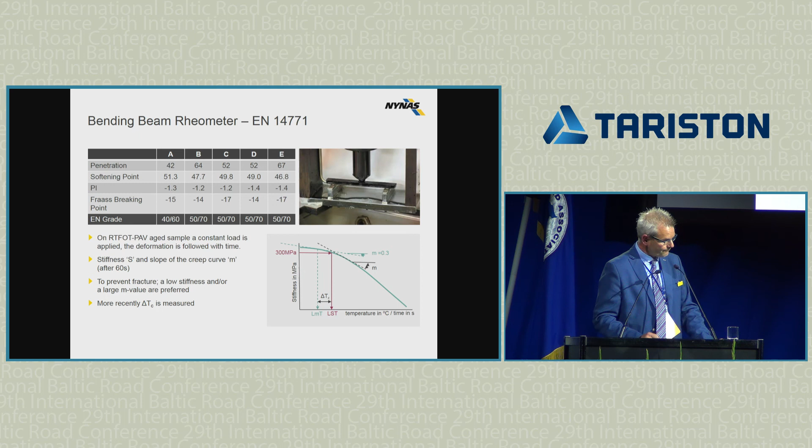Now, this parameter is not measured on fresh bitumen. In actual fact, it's measured on bitumen that has been aged, not just short-term aged, but also long-term aged. Short-term aging is part of the European specification, but long-term aging is not part of the European specification for bitumen. Now, aging is not a property of a material, aging is a process.

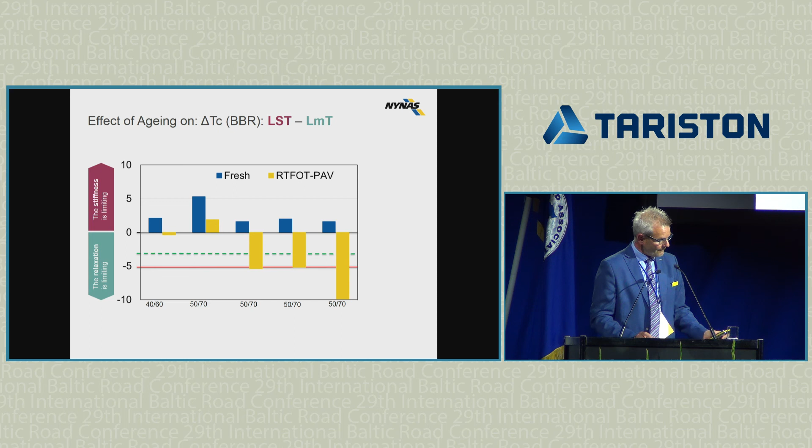That look at the bitumens in a traditional, empirical way, but also look at the material on a rheological scale using new test methods. The next graph is presented a little bit colorfully. Along the x-axis is short-term aging in terms of changes in softening point from a rolling thin film oven test on a standard bitumen. This is part of the European specification. If the change in softening point is less than 8 degrees, it's okay, it conforms to the specification. If it's between 8 and 10, it depends a little on the grade whether it meets the specification. But if it's more than 10, you're outside the specification, so it's red.

On the y-axis, I've given the delta TC, whereby anything above minus 3 is okay. Anything between minus 3 and minus 5, there's a risk of cracking. And anything below minus 5, there is a serious risk of cracking. These are the 5 bitumens that we've tested, and you can see they all meet the short-term aging test, but there's already a difference in delta TC, so we'd expect a difference in long-term aging behavior.

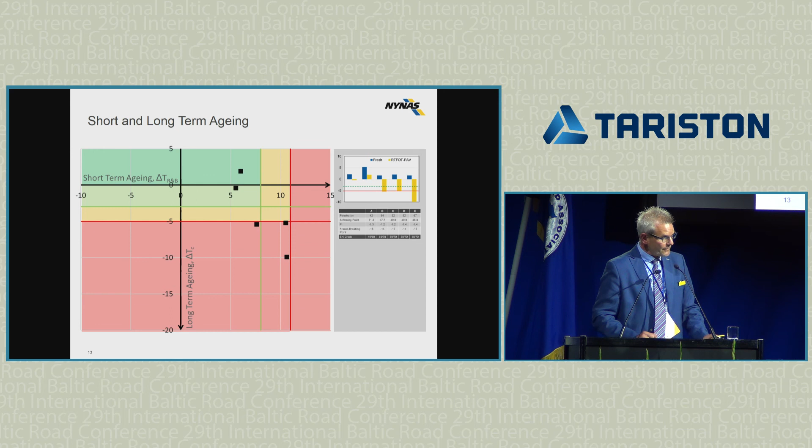When we talked about delta TC, we've also looked at these materials in the Glover-Rowe plot, which Professor Pellinen has already shown. We can plot those 5 binders that we tested in the laboratory as well, and they look very much the same. They start at the bottom right-hand corner when they're fresh, not aged. But as you start to age these materials, you see them move up into the cracking area. Here you can see the bitumens A and B that performed best in delta TC remain in the area where there's no block cracking, while the bitumens with a high negative value of delta TC are in the block cracking area.

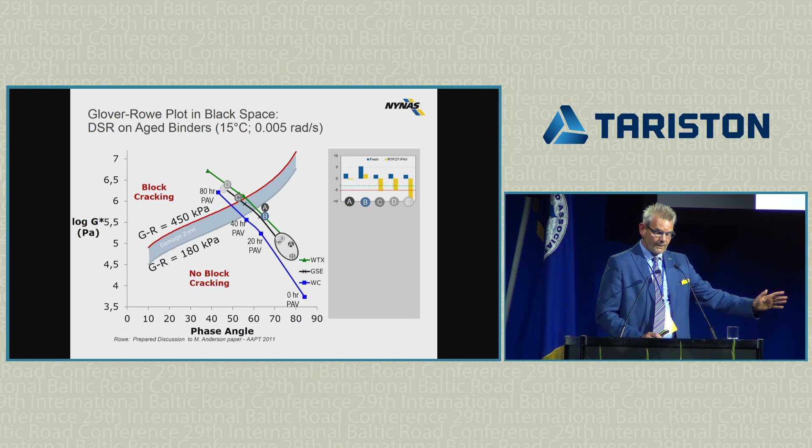So, concluding: bitumen travels further nowadays than it used to, giving diversity in source and supply, and also in supply chain operations. Specifications today have to be performance-based, and that must include long-term durability. We see when we look at published data that there are wide variations in delta TC of bitumen in Europe, so long-term performance is expected to be very different.

We need further work to validate the concept of delta TC, but I think it's important, when selecting the bitumen for your asphalt application, that selecting the right bitumen for that application matters. So, hopefully, bitumen is not just black, but there are many shades of black.

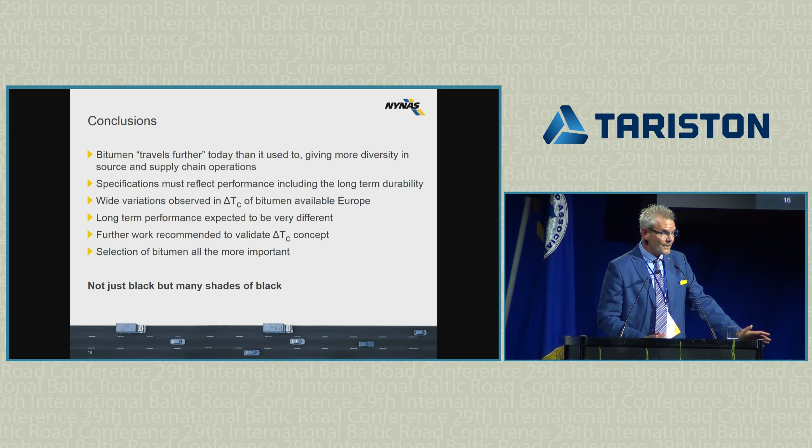So, thank you. This presentation concluded our session, and I'm not the guy who's standing between you and coffee. So, thank you.